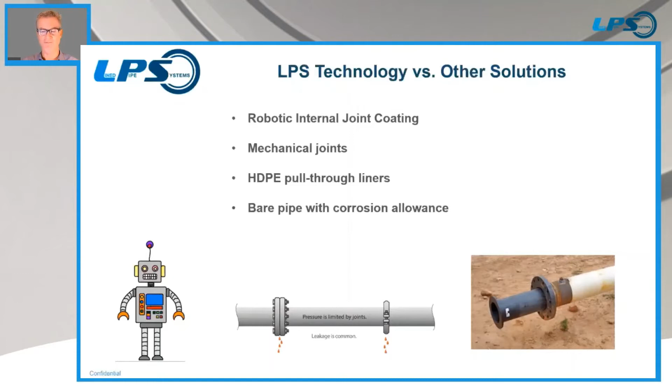So first off, our technology as compared to the robot. Robots have a number of quality issues, and one of them is the fact that they've got to paint over internal weld penetrations, which can be very challenging. I've spent a lot of time trying to get welds pinhole free inside of tanks and pipes in my career, and that's when you can actually see them. And I'm sure the robot has access to them, and they've got the video cameras.

But the problem is that not all weld penetrations are the same. And with their system, they really need to have very smooth weld penetrations. Otherwise, it's nearly impossible to get a pinhole free lining. So you've got a few photos there showing. Let me get the pointer going.

You've got a few photos here showing some jagged weld penetration. I'm sure it's not always that bad. You've got some weld spatter. So any of those locations are going to be very difficult to get pinhole free. And even if you do get them pinhole free, it might be a pinhole location that would open up in the future. Our technology completely eliminates that issue. Our rings actually make welding easier and reduce the frequency of weld defects because they serve as backing rings.

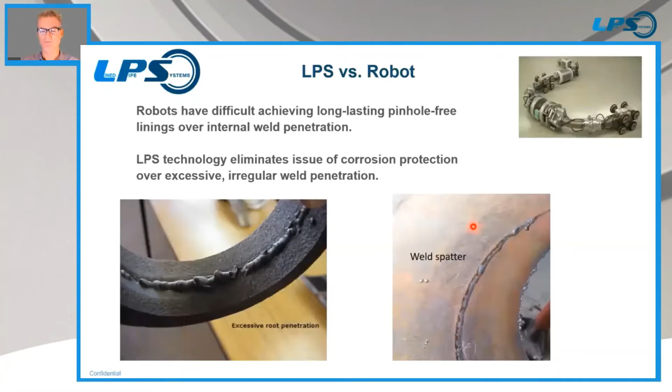So another big problem with robots is it's a field applied coating. Anybody that's been in the coatings industry knows that it's much easier to apply coatings in a controlled environment, a shop setting, and perform quality control. Whereas anytime you're in the field, there's unpredictabilities. Whenever there's a wide temperature fluctuation during a day, the cure times can be greatly affected.

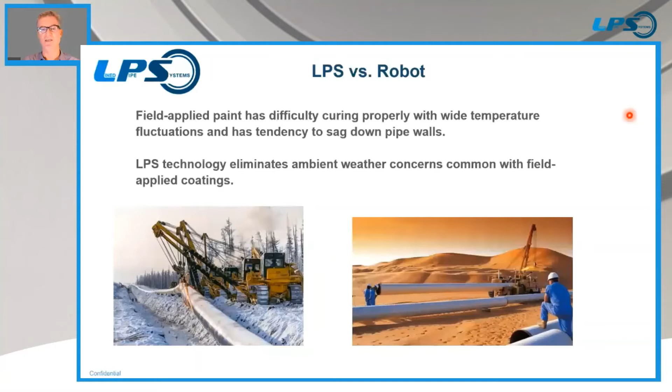They will adjust the cure time of their paint based on the temperatures, but in the morning it can be cold, middle of the day it can be very hot, and the paint can actually have a tendency to sag down pipe walls as well, depending on temperatures of the steel. So whenever you can avoid applying coatings in the field, generally that's done in industry. And with the LPS system, obviously it completely eliminates that problem. When the rings and sleeves arrive at the job site, they're cured, quality controlled, and ready to go.

So besides the quality concerns, one of the biggest issues with robots is the fact that the coating occurs after the welding is done. So the mainline crew will be welding along, moving down the line at a pace of a kilometer and a half a day. Robots simply can't keep up with that pace. So what ends up happening is tie-ins are left open. So they'll construct maybe 500 meters to a kilometer. They'll leave the ends of the pipe open so that the robot can get in and out behind them, coating all of those welded joints.

And because the robot can't coat as fast as people can weld, the robot crews end up getting far behind the mainline crew. So from the projects that we've heard from, primarily in Chile, but I'm sure it happens elsewhere, if the mainline crew is moving along at a fast pace, the tie-in crews and the robot crews will be left far behind, 20, 30, 40 kilometers we've heard, and often extend project timelines up to at least a few months, which just costs tens of millions of dollars.

So the all-in cost of supporting those robot crews spread over tens of kilometers is far, far greater than just the actual cost of the robot coating itself. You have to have support crews, and it really increases complexity for the entire construction project and logistics. You can't completely bury all the pipe until the robots are done. So that's one of the primary reasons several large contractors really refuse to use the robot.

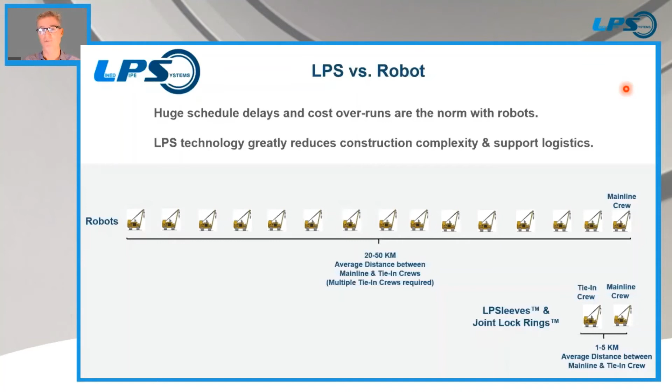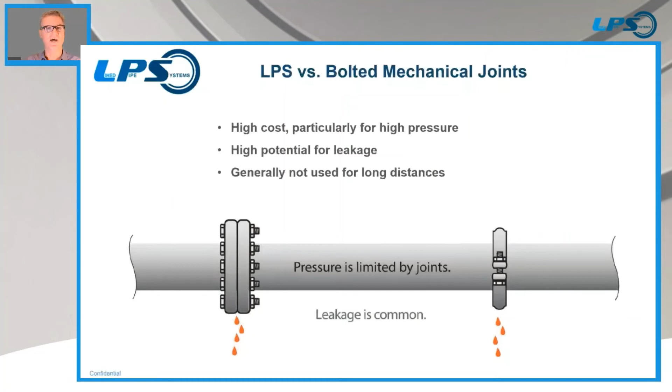So mechanical joints really, again, avoid the problem altogether. A problem with mechanical bolted joints is they're a high cost, particularly for high pressure. Generally, they're not buried. Most places have rules against burying mechanical joints because they have a tendency to leak and you won't know when they leak. They just really aren't generally used for long distances. So for long distance, high pressure pipelines, it's really not so much of an option that you'll see out there.

The HDPE liner is really a fairly prevalent solution for pipe diameters that are smaller than 18-inch. When they first came out with the solution 20, 30 years ago, it really was a fairly good solution to the problem because there wasn't really anything much better. So they'll construct 500 meters, maybe a kilometer at a time. They'll pull the HDPE liner through it, flange off each end, and then go on to the next section, as you see here in the photo.

There's definitely some limitations. First off, larger diameters, the cost really gets up there when you get to larger diameter pipe. The pigging is a big issue. Pigs are known to get stuck in the pipelines, and several engineers don't recommend pigging just because they stress the liner. The liner is not bonded to the pipe wall, so as the pig goes through it, it stresses the liner and can cause it to sag, and that's one of the major issues. That is that over time, HDPE liners are known to sag off the pipe walls.

At least for concentrate lines in Chile, most engineers have told me it's not a question of if they'll collapse, it's when. And generally that time frame is in that 15, 20-year time frame. And then when we have to repair those sections where the liner collapses and plugs the line, those are also very complex. You don't just cut in and weld in a new section. You have to take out the entire liner for that entire kilometer and replace it, which takes up a lot of area, a lot of time.

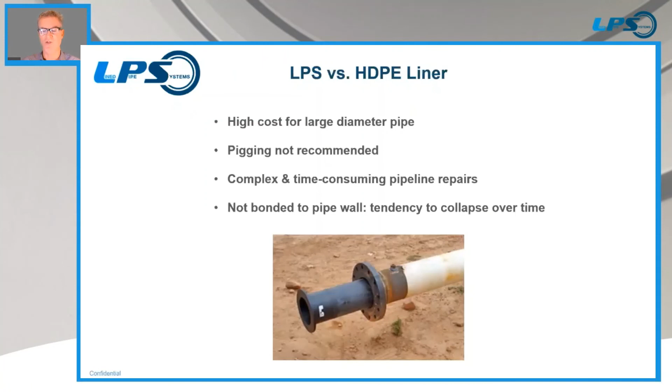Bare pipe without any internal lining is actually one of the choices that have been made throughout the years, I think primarily because there really has not been a good solution for welded joints with internally lined pipe. So you really have a short, unpredictable lifespan. They will generally build extra wall thickness in the steel to have a corrosion allowance. But the corrosion rate is often very unpredictable. It can corrode faster in one location than another. And it's generally frowned upon. A couple pipelines are being built right now that we're aware of, where many engineers are really questioning why they went without an internal lining.

Corrosion inhibitors can be used, but that's not really a perfect science. It's a complex science in itself. It generally does not cover the entire distance of a 100+ kilometer pipeline, and for a long-term solution, it's really not going to give you the longevity that you're looking for.

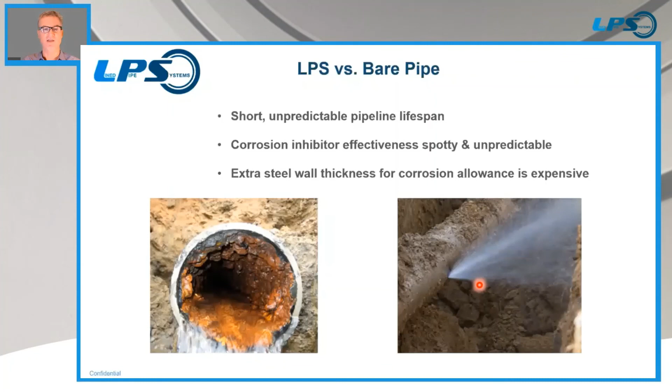So when it comes to our solution, you simply insert these rings or sleeves in, do your weld. When the weld's done, that's it. You move on to the next one. You don't have to worry about it. It's really not that difficult to compare to some of these other solutions. Some of the other ones are incumbent technologies, but we all know that the incumbent is not always the best solution.